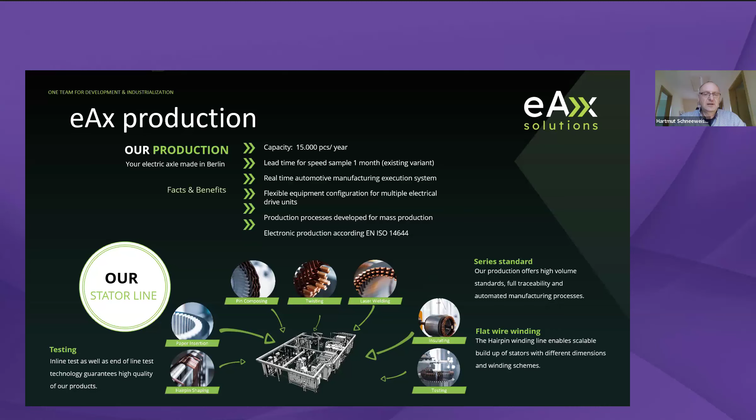Now let me start with the special technology of e-machines, 800-volt power electronics with silicon carbide technology, and battery systems, which are well known today. Also a look into the future of the new solid state technology. I will start with an overview of the e-machine. I think they are well known. You can see the existing types of e-machine: the asynchronous machine, the different variants of permanent excited synchronous machine, also the very well known externally excited synchronous machine, and, not so interesting for the automotive sector, the synchronous reluctance machine.

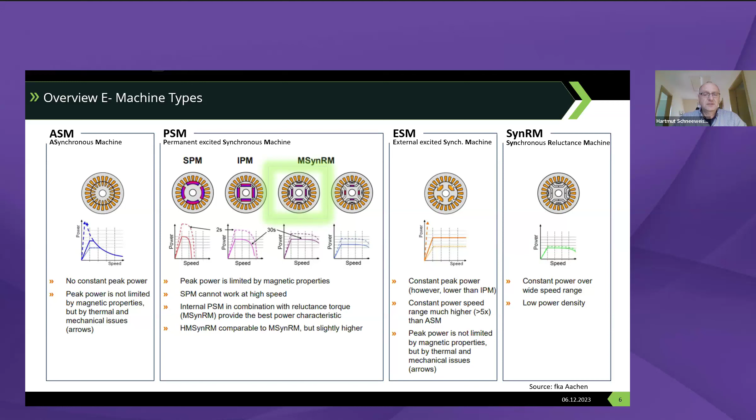In this presentation, I will take the main view of the permanent excited synchronous machine, with magnets inside the machine, which, as you can see in the comparison of these small diagrams, has the best configuration of speed over power. That's the reason why we go in this direction of designing an 800-volt machine for eAx Solutions. A short overview about our existing variants.

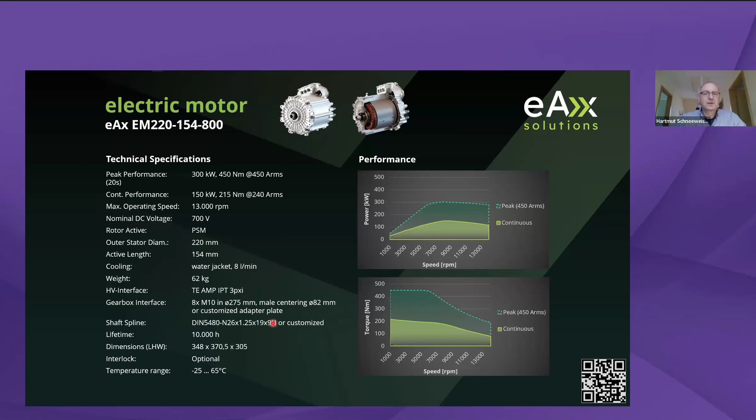The main machine is our EM 220-154-800. That means the active outer diameter of the stator is 220 millimeters, the active length of the stator is 154 millimeters, and 800 volt indicates working with the 800-volt system. We have two main variants, also available in different lengths, with a peak performance of 300 kilowatts and 450 newton meters. Continuous is half of that, 150 kilowatts and 215 newton meters. The actual maximum speed is 13,000 RPM, but we are working to get more than 16,000 RPM. The other points you can get in the information sheet available on our website.

The longer version, with 205 millimeters active length of the stator, has a peak performance of 360 kilowatts and 720 newton meters, with half of that as continuous performance, also on the torque side. And we have a maximum operation speed of 10,000 RPM.

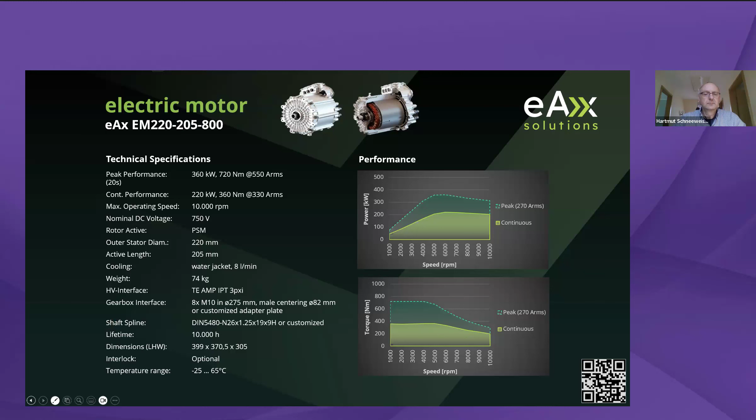Especially for agriculture applications, we designed an ePTO variant. PTO means power take-off, auxiliary drive systems used in construction machines and agriculture applications, and the E means it's electrified. We are able to give a peak performance of 160 kilowatts with 710 newton meters torque, and around half of that continuous, 90 kilowatts and 200 newton meters. This product is completely new because now is the time to electrify all the diesel aggregates in agriculture and construction machines. This machine is of very high interest today in this non-automotive area.

From the transmission side, in-wheel hub motors and axial flux machines are special applications. We do not produce or develop these. Today, it's possible to use our machine in the 3-in-1 standard solution, meaning integration of e-machine, power electronics and transmission. With our partners, especially Bosch Rexroth, we can provide you a complete axle drive system with these 3 components.

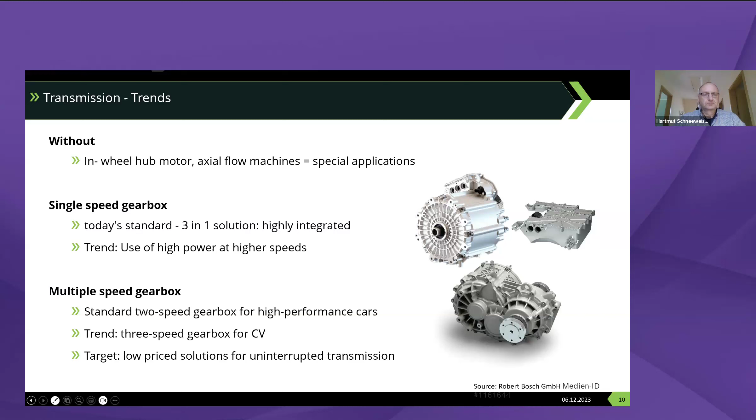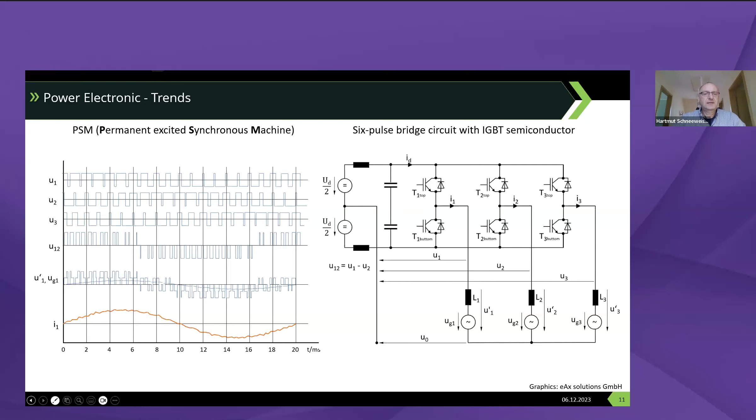But what happens in the future with this kind of semiconductors? For that, we, Bosch and eAx Solutions, made a study with the 3 most interesting semiconductors. The well-known automotive standard today, the IGBT. In comparison to that, the silicon carbide components, which are going to be a standard now and in the future. And also in discussion for automotive applications, gallium nitride, which has the highest efficiency but at the highest frequency, that's for sure.

We made this kind of spider diagram, and you can see in the area of efficiency, power density, high voltage usage, robustness, easy production, and price performance, that today the IGBTs have a big advantage because they are well known. They have been over 30 years in series production. And for that, they have some big advantages in this area.

The silicon carbide will give us a higher power density than the IGBTs in the future for sure, and also a better efficiency. Much better can only be reached by gallium nitride technology. But you see, we have some issues with high voltage usage and above all, in automotive, with robustness.

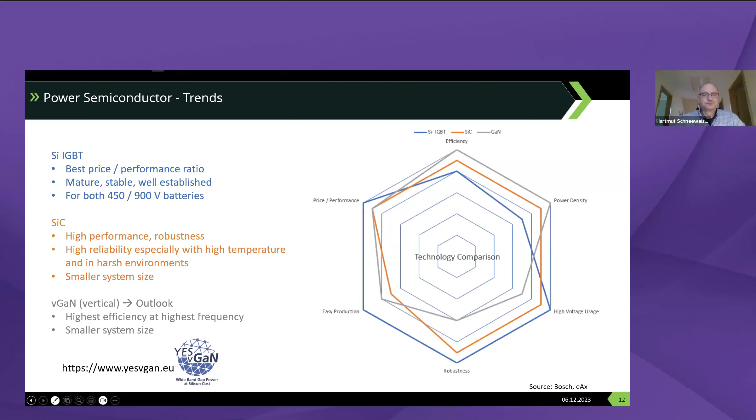Also the switching frequency for the SiC components could be in the area of 100 kilohertz. I think we don't need this high number of 100 kilohertz, but for example, and that is usable today in telecommunication applications, you can have a switching frequency of gallium nitride semiconductors up to 10 megahertz. That's the big advantage, as we have seen in the spider diagram before.

The robustness of silicon carbide is much better. And also the thermal robustness is much higher than IGBTs. The temperature could be up to 300 degrees instead of 150 degrees for the semiconductor plate. So for that, we announced the silicon carbide MOSFET for 800-volt applications and the silicon MOSFET or the IGBT in the area of 400 volts.

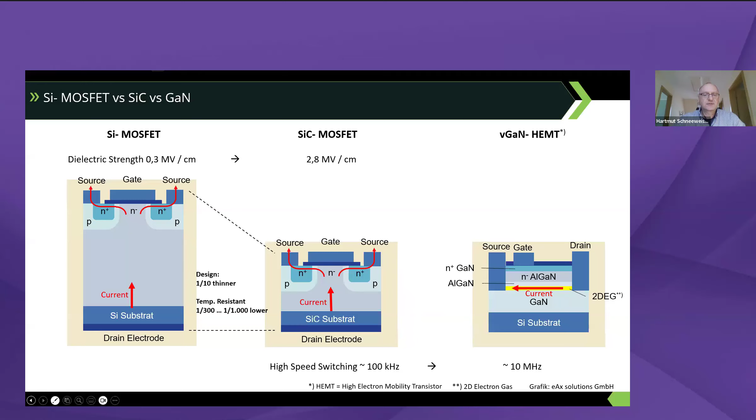Then let us have a close look at the battery systems, the energy storage. I will give you an overview of the cathode concepts and comparison to that. I've also made a spider diagram to give you an overview of the advantages and disadvantages of these technologies. In the first step, we have a comparison between the NMC and NCA technology and the LFP.

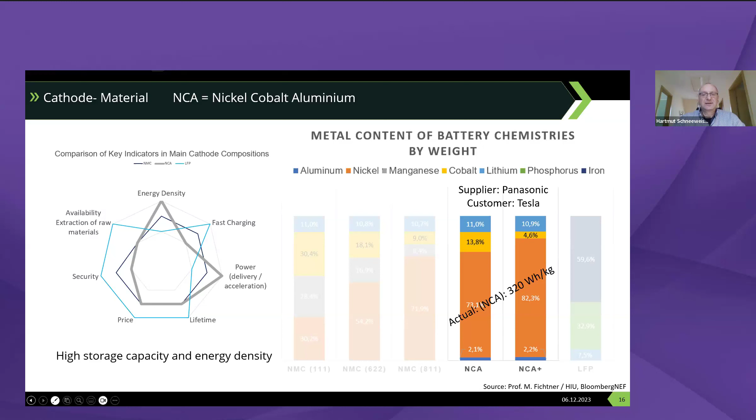Today, the customer is Tesla, for example, and the main supplier is Panasonic. You know it if you are an insider. And the most discussed alternative, to have no cobalt, no nickel, no manganese inside, is the new LFP, lithium iron phosphate technology.

Big advantages: we have good availability of the materials, high security, low price, and high lifetime. The only big disadvantages are the power delivery and the energy density of this kind of technology. But for charging time, we have better charging times than the other two existing technologies. So for the low energy density and low power delivery, there will be some new ideas

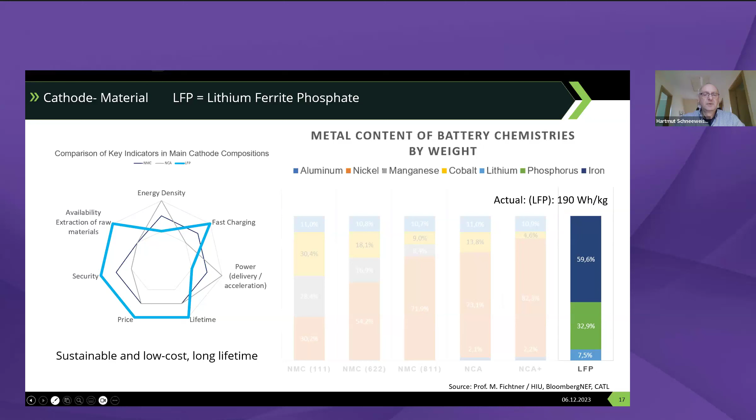going into new battery designs. Today the energy density is not much higher; it's lower than NMC, at 190 watt-hours per kilogram. But from this position, it's possible today to go to cell-to-pack technology. CATL, for example, is working very intensively on that to reduce the volume. You will no longer use special modules; you will pack every battery directly in one module. That's the reason you can reduce the volume by up to 20%.

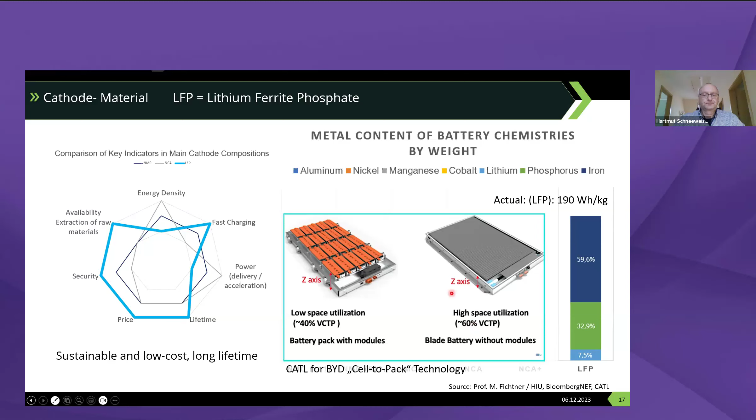Compared to the existing technology today, this is an older prognosis. It started in 2015 with a prognosis to 2030. You will see today, and that's true I think, the main technology with over 50% is NMC inside the cars. LFP is coming, more than this prognosis shows, I guess. NCA will stay constant because for higher performance cars it's very realistic also in the future. And other technologies will come on the market.

There was information about solid state technology, which is now over 10 years old, and the first suppliers are now announcing serious production in the next years. And sodium ion will be a very interesting alternative to lithium, because sodium is much cheaper than lithium and available in enormous amounts on Earth.

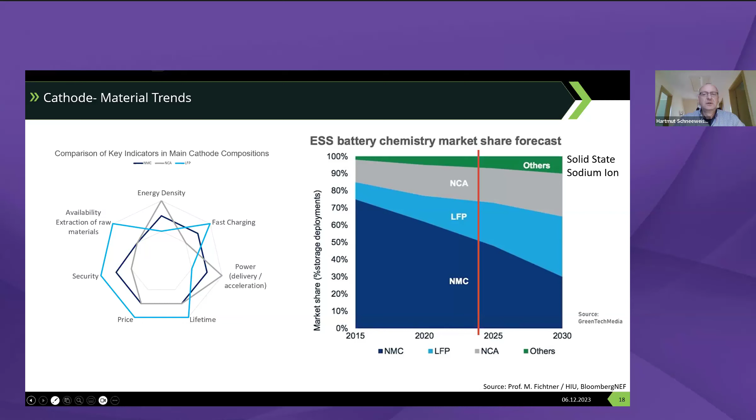I have looked for an actual prognosis from Rethink Energy that shows what happens with batteries. This picture looks like the one before. The main part is the existing high nickel battery demand with NMC and NCA technology. We have a good development of LFP technology, and the sodium battery prognosis is a small part, not much higher in the future. So LFP could be the most important thing.

And if ASSB, all solid state batteries, come, and the first supplier said the serious start begins in 2027, then the solid state battery will also replace the existing high nickel battery technology. That's the prognosis up to 2040.

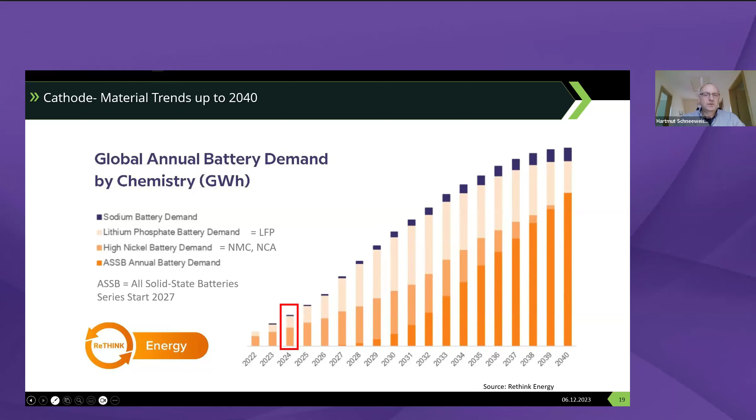All these components, battery system, power electronics, e-machine, transmission, will now be shown in one simulation of a system. First, I will have a short discussion about the WLTP cycle. Then I will show you a MATLAB Simulink model and the results of this simulation with new components like a silicon carbide inverter, an 800-volt e-machine, and the existing NMC battery technology.

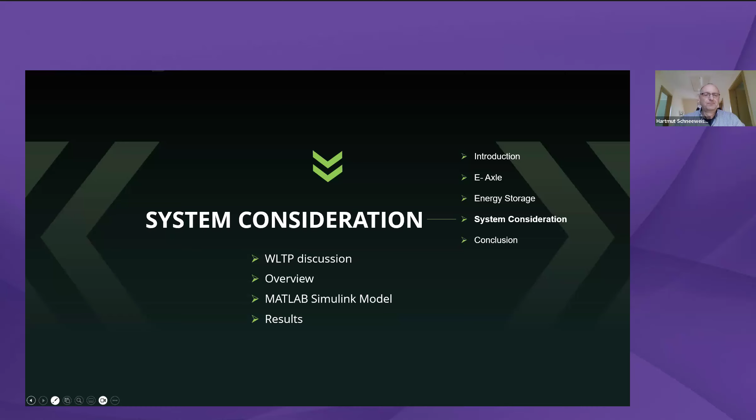First, I will show you some self-testing. I drive a smart, especially in the Berlin area. It's a very good car, the electric smart. The WLTP cycle is well known with its four different working areas, from the low speed area up to high speed like on the highway. For that, I made my driving profile from home to my workplace. It's not so similar to the WLTP, but it also shows different areas of lower driving, higher driving, and some parts on the highway.

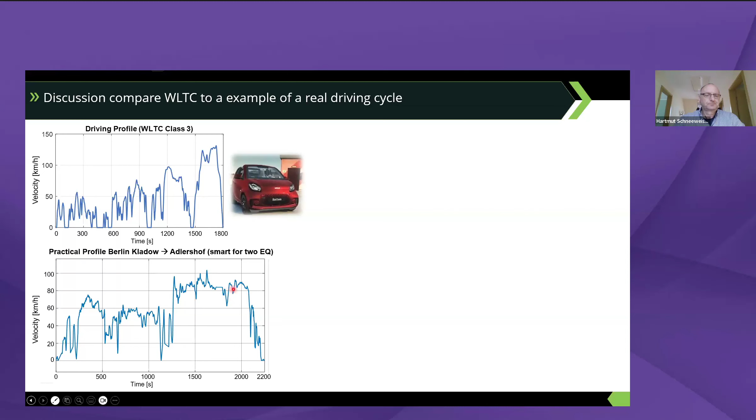When I compare the energy usage of the WLTP with my special driving cycle, you can see the blue line, the WLTP cycle energy, is the same consumption as when I drive my Berlin cycle. That's the reason I think the WLTP cycle could be a very good comparison for electric cars, to have a clear picture of the energy usage of this kind of machine versus other ones.

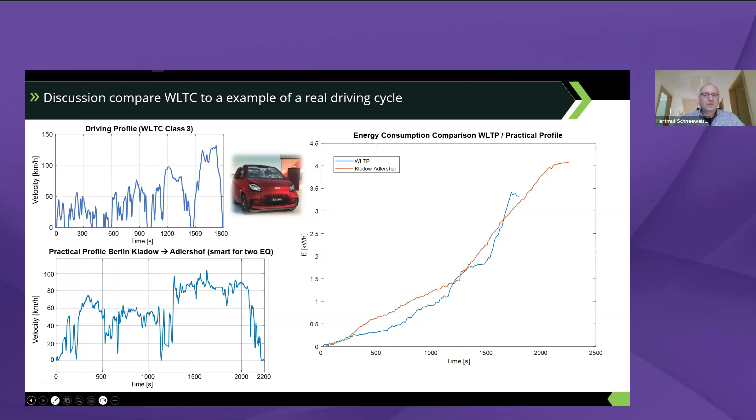For that, we made a simulation of the WLTP with a standard car. I think it was a Volkswagen ID3, with an NMC battery of 42 kilowatt hours, the new 800-volt electric axle drive system, and the new Bosch silicon carbide inverter. The input is the driver and the WLTP cycle, and we look at what happens with the energy consumption.

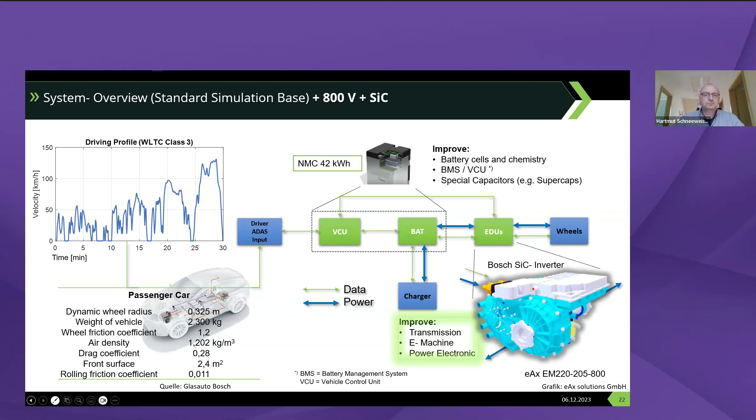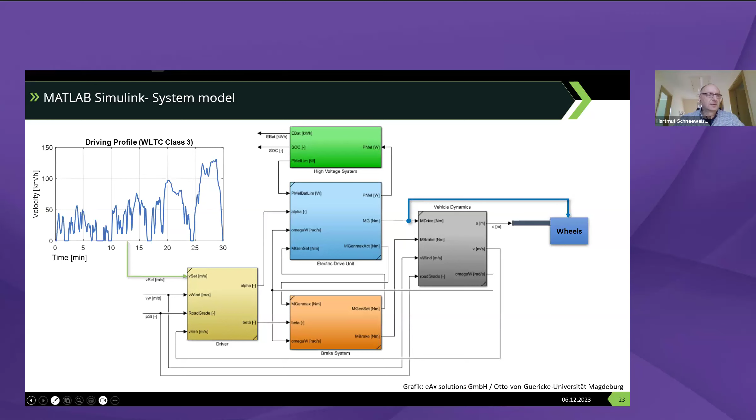Our improvement focus was also on transmission, e-machine, and power electronics. For that, we made a MATLAB Simulink model to have a clear picture of what happens in the different component areas. Especially for the area where you drive on the highway, the Autobahn, we will look at this short piece of the cycle and see what happens with the system.

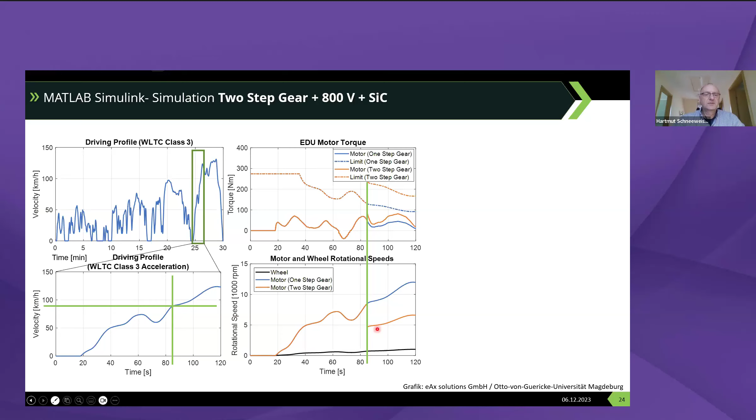So we have, for example, the motor torque on this picture, and you can see something happened in the area of 85 seconds, and that shows us that I will also have a comparison between one-step and two-step gear. You can see here what happens in this area.

The process was to have a ratio of 11.8 with the normal one-step gear, which is also used at higher speed, and with the two-step gear a switch from 11.8 to 6.5 after 85 seconds. And first, the efficiency diagram: you can see that's the system efficiency. It shows us the normal cycle. Also, the recuperation phases are there.

No efficiency measurement happened there, but you can see in this area that there was a significant increase of the efficiency when we go in the step from 11.8 to 6.5 gear ratio. And also, the better 800-volt system with silicon carbide gives us better efficiency of 0.92 with this new machine and power electronics in addition.

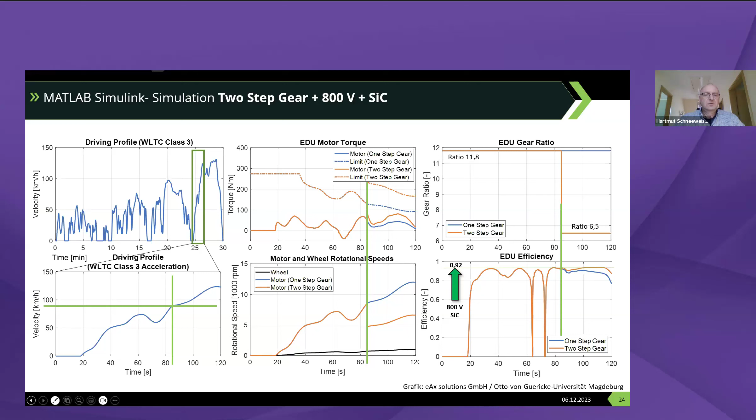And to show you what happens, it's very interesting to have this kind of efficiency diagram. All the dots show us the different working areas of the WLTP cycle for one step. And when I can use the two-step transmission, you can move all the dots from the high motor speed to the lower motor speed. And the effect is that you increase the efficiency and reduce the energy consumption from the battery side by better than 6%.

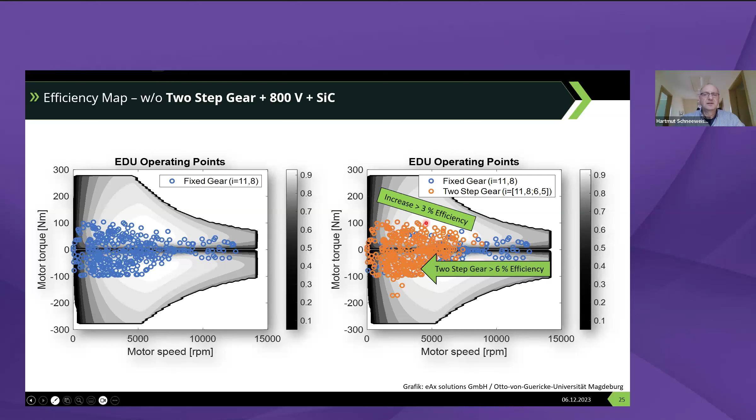And with usage of 800-volt and a silicon carbide inverter, you can have an additional efficiency improvement of 3% in this area. And in conclusion, for the WLTP cycle with the different two-step gearboxes, we have an energy consumption reduction of 10%, which for this kind of simulation in the first step is very interesting. And in the conclusion, I can give you also an overview of the price side, or what you can save on cost when you take a two-step gearbox with new power electronics and new electrical machines.

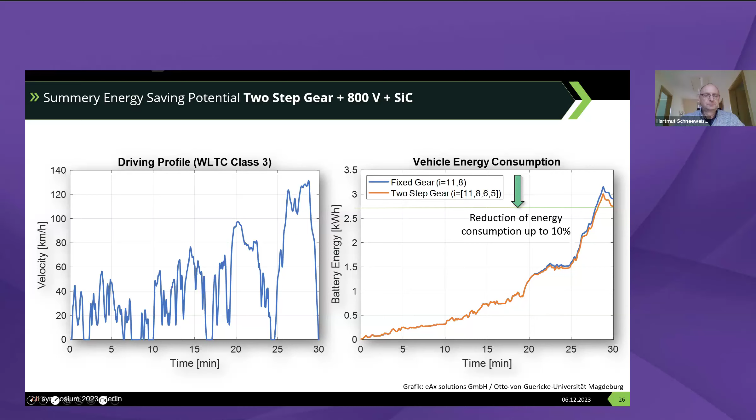So I'll come to my conclusion. First, the e-axle: I think there's no discussion that the permanent magnet synchronous machine will have the best efficiency in the automotive solution also in the future. But there are also alternatives like the externally excited synchronous machine and the induction motor. They are today very good alternative technologies for this application. And especially when the price of the magnets increases, I think these two types of electrical machine can be a good alternative in future automotive and also non-automotive applications.

And the new standard for 800 volts will be the silicon carbide inverter technology, but be sure that this new technology will also have an effect on the insulation technology of the machine, because we have much higher dU/dt. The rise of the voltage is much higher than in the 400-volt IGBT technology. So you must also look at the e-machines for the insulation materials and the insulation strategy.

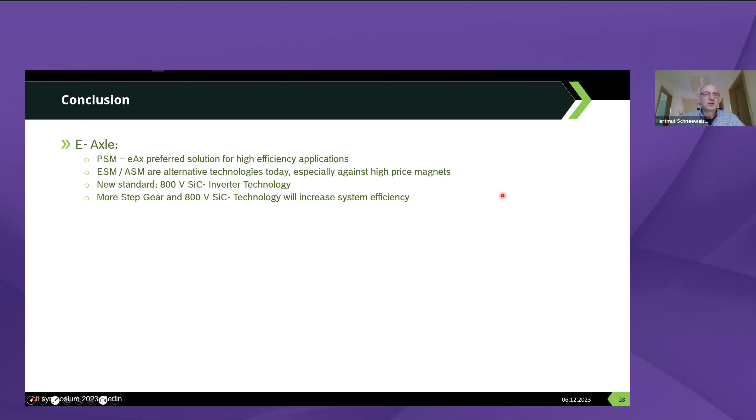And I think in the future, especially for cars with longer range and more high-speed or autobahn parts, it could be interesting, and some examples already exist with a two-step gearbox, to think about a multi-step gearbox and 800-volt technology, which I showed you in my simulation example.

Battery system: I think the LFP technology as a cobalt-free alternative will take the largest part of the market in the future. Also from the economic side, it makes sense to do it. The sodium-ion and solid-state technology will come in series not before 2027. That's what the suppliers said.

And with the battery, everyone is talking about recycling. I think in the next step of the life of the battery system, the second life is very interesting. That means using old batteries from passenger cars, and then the second life as static storage to save the energy from houses and so on in the future. And the second life will also last 10 up to 20 years for such a battery system. So I think recycling will be very interesting in 20 years at the earliest.

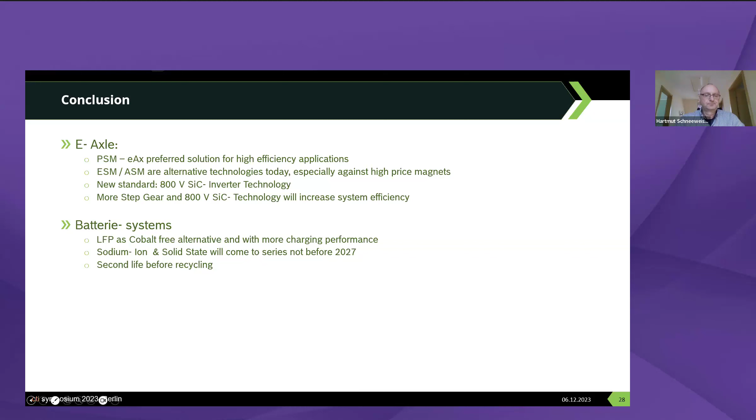And in my system solutions with the optimization of the axle system, I showed you an example of two-step gearboxes with silicon carbide inverter and 800-volt technology. That brings us to the idea of downsizing the machine on one side, but it also offers to save 10% of energy, so you also have a cost-saving effect.

So today with 2 kWh saving, we talk about reducing the battery system by 2 kWh, which reduces the cost by 240 euros for NMC technologies. The assumption is 20 kWh per 100 kilometers today and 120 euros per kWh for battery storage. I heard new numbers. The numbers today go more in the direction of 70, 80 euros for batteries, but in the NMC and NCA technology, today the prices are more than 130 euros per kWh.